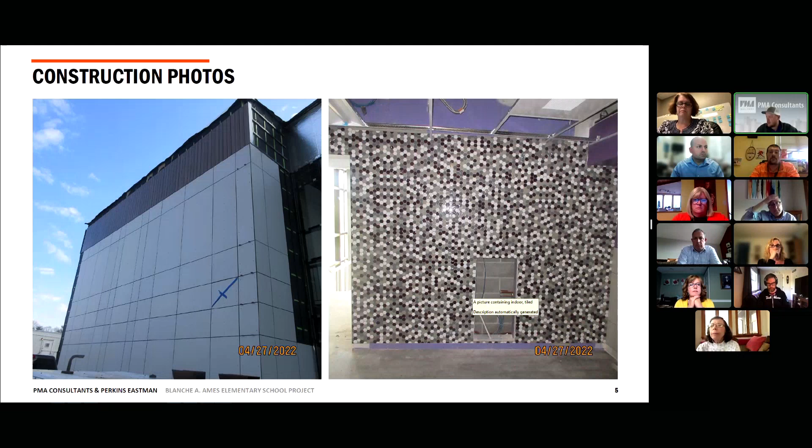On the left, you'll see a photo of the most westerly end of E-wing. At the top you see the wood phenolic panels, and on the bottom you see the fiber reinforced panels going up around the building. On the right of that picture, you can see the curtain wall at the stair. On the right-hand side here, you can see the accent wall at the end of E building, just inside that staircase. And you can see the cutout for the bottle fill station, a chilled bottle fill station. So a lot of progress moving along in E-wing.

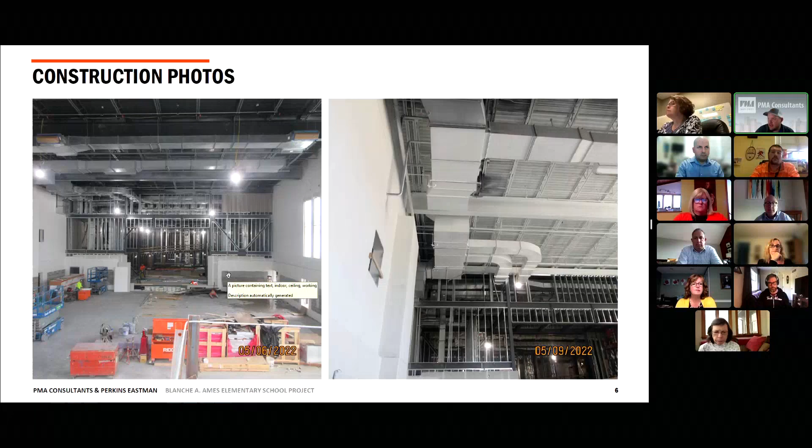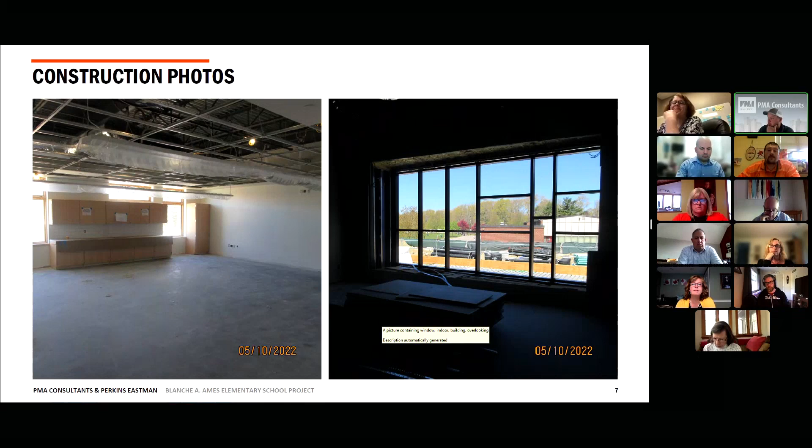On the right-hand side, you can see a photo of the seating area at the top of what is A-wing, outside the stairwell. A nice seating area looking over the fields—what will eventually be the fields, currently overlooking Parkview, and it'll be the fields and the playgrounds.

Moving right along, you can see the utility trench being prepped right there. It has the stone in it, has the water, has the gas.

Moving right along, on the right you can see the structures at Spooner Street. These are the relocated new structures that are going to handle the water coming off the street. They are tied into each other now. They still need to have their final tie-in to the connection further to the right of that photo.

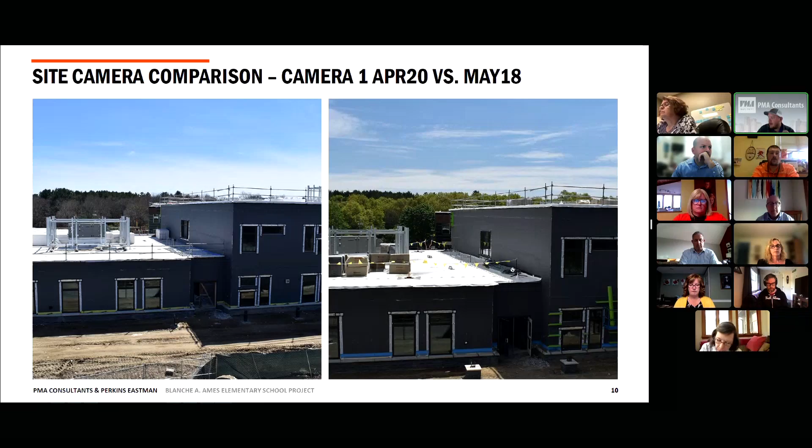On the left, you can see the comparison between last month and this month. You can see the AVB is continued, it's final. The roof has been cleaned off. We have just the cover board up there now. So not a lot of progress on this area, but let's see on the other two photos, quite a bit.

On the left-hand side, you can see the difference. They've moved the green girt and the insulation right around the building. And then the progress update between last month and this month, you can see all of the fiber panels and the wood and the replica wood going up all along the building as well.

Happy to take any questions if anyone has any on the construction update before I head into the next item. You can just yell them out.

I can see everyone. Just one question on that water piece - that's the storm runoff piece you were mentioning that's going to get connected to, the next one, that one. That's the replacement for, or I guess the mitigation for the water runoff.

It's a little bit more than that. The new structures that need to go in to handle the impervious surface on the road we're creating, there was a structure there already. In order for us to get to these two structures, the pole behind it needed to get relocated - it has since been relocated. So we're really enhancing what was there. There was actually only one structure there before, and now we have two, so it handles a little bit more.

Awesome. Thanks, Walter.

Walter, I think maybe one of the last meetings, there was a question on the outside panels, the coloring - some of them were not consistent. Was that resolved? Since we've met, we have had some literature come back from the manufacturer. Is it, Dan, correct me, Equitone, is that the name?

Equitone. They have literature stating there is an allowable fluctuation in color. So we need to get them to send us - they sent us some samples, but not of the color that's on this building. We want them to send the sample of what's on this building and what the allowable fluctuation is, manufacturing fluctuation. So we have a request in with them. They, as Dan said, sent us unfortunately one that had a red color on it, but they need to send the exact color that we have, and the designer will review that in the field and determine if these are acceptable variances as noted in their submittal.

Is that something that's going to change with weather as well? I mean, are they going to weather out to the same color?

Dan, I don't know if there was any mention of that. No, they're UV stable, so they really shouldn't change too much with weather. They do need to be washed still at this point, because we walked by them today and there's definitely dirt and dust on them from install. So that certainly needs to happen, and that'll change them somewhat. But I think it's really the end of D-Wing that is the area we were most concerned with, because it's a very big field of just this material, so you can see them popping out in different shades.

It's less prominent in the other areas that are put up now. I'm trying to... yeah, there we go. So Dan is speaking to this area of the building right here.

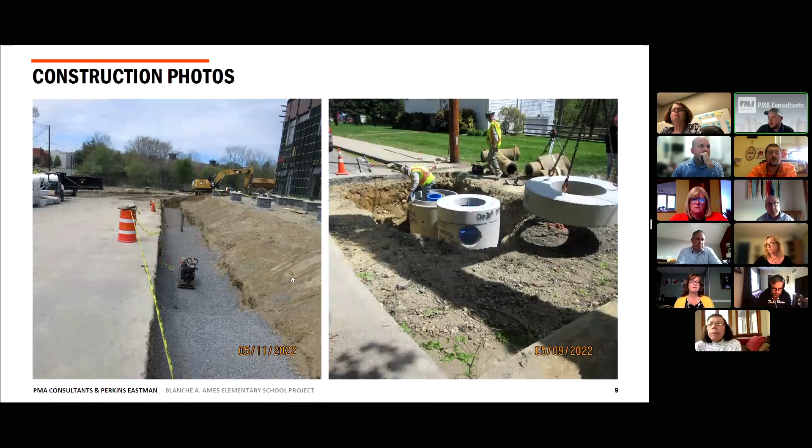Yep. But that is in process. We have that under review with the designer and then also with the manufacturer as well. Thank you. Yep, no problem.

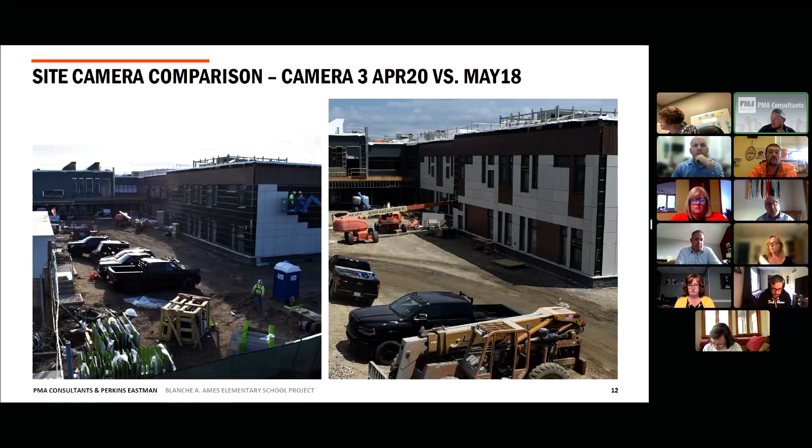DEP was immediately notified. All of the regulations and procedures were followed by Construct Oil. They notified the fire department, PMA notified Easton Fire. Remediation efforts began following that. They were on site within 2 days working on excavation.

At this point in time, and as an update as of today, Brait Builders is working through Construct Oil's insurance. So this is running through insurance right now. There is no cost exposure to the town of Easton. This is being done through an insurance claim. Whatever is not carried by Construct Oil will be done through the general contractor's insurance.

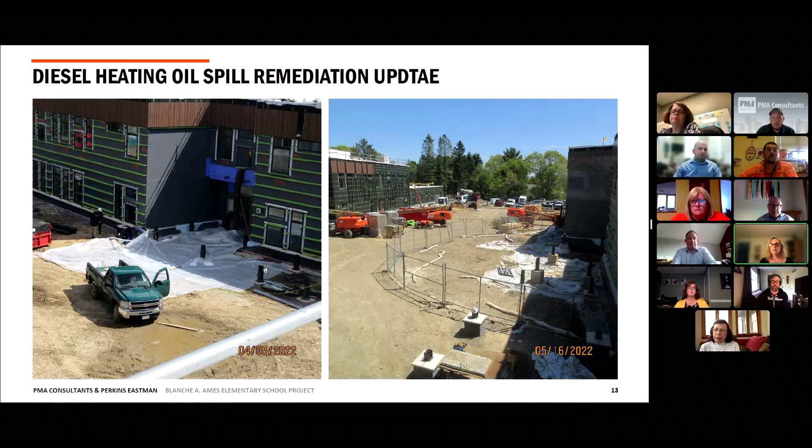Anyone else? All right, move right along. We'll go to a cash flow schedule update.

So to date, the project has billed $46.15 million. MSBA reimbursement to date is $18 million, and pending MSBA audit, so part of that 7.88 is in with the MSBA right now, and part of it has not been submitted, is being reviewed right now with MSBA.

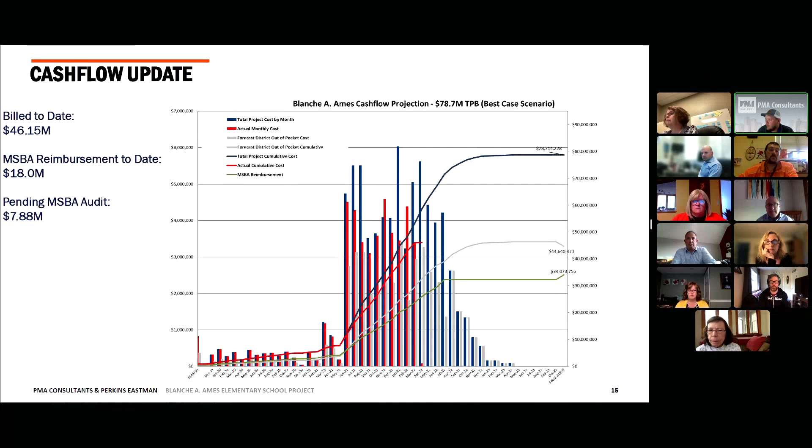Right now, you see the April numbers are not in there. We did just get a final revised requisition from Brait earlier this afternoon, so that did not make it in for this update. But it is in line with the expectations of where we'd be at this point in time for that requisition as well.

Construction look ahead: in the next month, we're going to look to have the fieldstone masonry complete, exterior window testing. I think we probably have one, maybe two more rounds of that going. Probably complete the green girt framing and infill with insulation around the entire building.

Continue the installation of all the exterior facade systems, so the phenolic panels, the fiber reinforced panels, the metal panels. MEP rough-ins will likely be complete at all buildings if they're not wrapped up currently. Resilient flooring is going to continue throughout the classrooms and corridors.

We didn't have many good pictures of that. It does get covered up immediately for protection, so unfortunately we don't get a lot of good pictures of the flooring going in.

Painting is going to continue in E, B, and D buildings, maybe a little bit into A as well. Installation of wall tile in the corridors, wall tile in the bathrooms, and floor tile in the bathrooms as well. That'll continue. Hookups of the rooftop units, so duct, plumbing, and electrical going to all the rooftop units on the building. Acoustical ceiling grid and ceiling work is going to continue throughout all areas of the building.

And our site work contractor has remobilized. Right now they're working on utility feeds and also on retaining walls throughout the site. We do have some retaining walls on the west side of the site that need to go in to assist with the installation of that new road, the creation of the new road between Columbus and Lothrop.

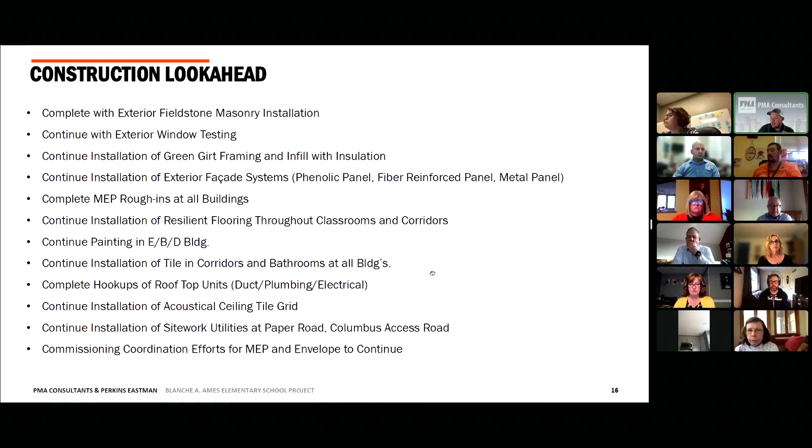Commissioning efforts are continuing throughout the building, both MEP and envelope. Good news there, we've not had issues, but it's been a great process so far with the town's MSBA assigned commissioning agent, SMMA. So doing really well there.

We'll run through a contingency update. So as of today, 55.7% of the contract time has elapsed. Of the 3.74 million construction contingency, we are tracking 2.4 available.

We have had 858,000 in change orders and current exposure of almost 447,000. Again, to remind everyone, the current exposure does not represent what will be paid. It is just what we're aware of at this point in time.

PMA and Perkins Eastman are always reviewing any type of exposure to make sure that the town is receiving fair and reasonable pricing from all the contractors on board. And that does also include stuff that has been rejected at this point in time, but has not been closed out with the contract, with the general contractor.

As everyone is aware, the select board authorized up to $900,000 to be moved over to FF&E and IT overages. We are working on finalizing the buyout through that package.

We have an update further down in this process, but we are tracking right against that number. We've had quite a few go through. We're working on making sure we have all the backups so that the contracts can be signed. The PO has been issued, it's just finalizing the documents. So those numbers are with the vendors right now.

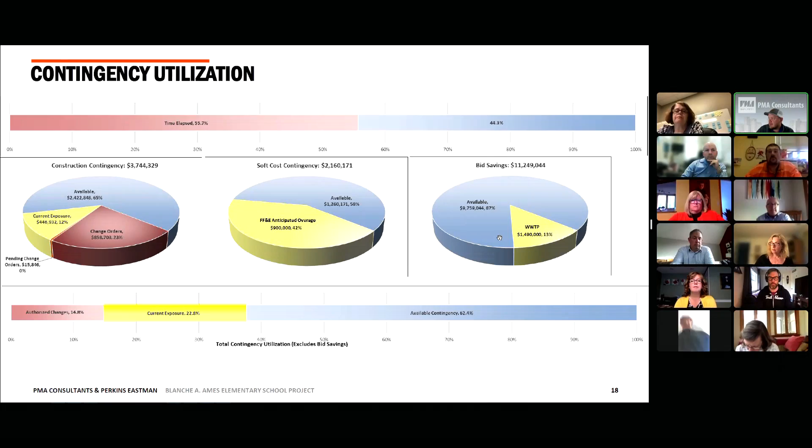Moving on to that FF&E IT budget update. So currently we have 1.7 million authorized. And then at the select board meeting, the 923 went on April 2nd, so that was the second round of invoices.

We have $374,000 remaining. And as I said, we have a couple outstanding items with Pointline Space, our FF&E and IT procurement agent and installing agent under Perkins Eastman. We have digital display units, so teacher CPUs, computers for the classrooms throughout the school. That's one of the large items that's going to go against that 374,000 still.

So you can see furnishings were really the kind of budget breaker, the COVID bubble that really pushed us. Technology was actually able to stay right online with what we were anticipating. But we're moving right along with that process. We haven't heard of any issues. We're very happy to get those POs out early, especially for technology.

The PMA team's been working with Pointline Space to make sure this equipment's going to be here for the school, and it's actually, some of it's already arrived in some of the warehouses for the vendors. So we were happy to hear that.